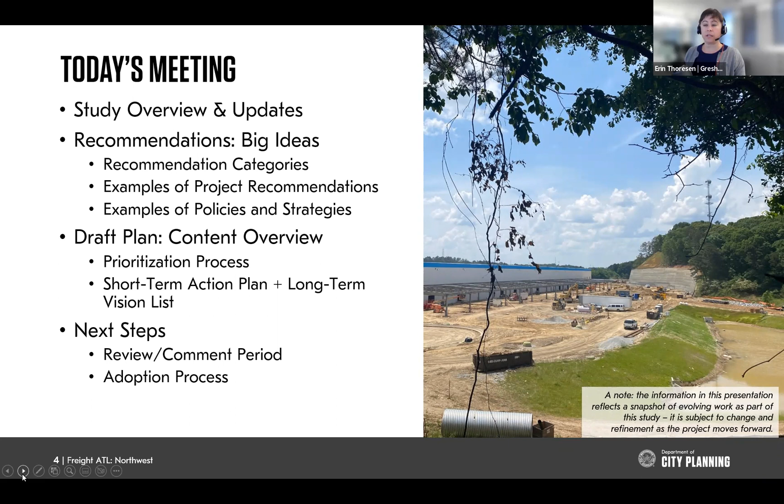I just want to mention that we are in the draft recommendations stage of this plan and process. So the information presented here tonight is a snapshot of a point in time where we are today, and some of this may change and evolve over the next couple of weeks as we respond to comments and make revisions based on the feedback that we get.

So with that, this is our planning study area. Nate briefly described it earlier, from the Armour-Ottley Industrial District and the Lindbergh area over to the Chattahoochee River, and then north of I-20, really north of Joseph E. Boone. This area was identified as a freight cluster when the Atlanta Regional Commission did their regional freight plan update back in 2016.

That's what this map here on the right-hand side shows. You can see right at the heart of this industrial area Norfolk Southern Inman Yard, the Chattahoochee Industrial District, the Atlanta Industrial Park, and others. At that time, they identified the need to do a more localized study and really focus on some of the needs and issues in this particular part of Northwest Atlanta.

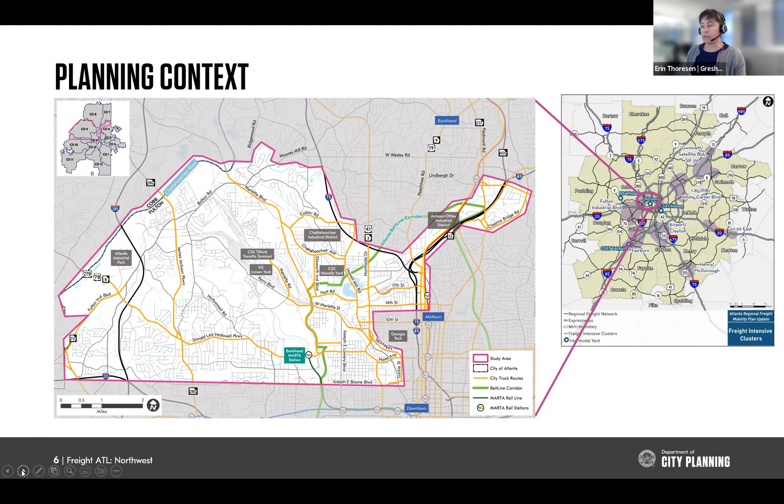As with all of the planning processes going on in the city of Atlanta right now, we want to take a step back and look at where we've come from and what the guiding documents are, and how they relate to Atlanta City Design, which is the city's visionary document guiding growth and development for the long-term future of the city. So all of these other planning efforts and studies follow on to that and are really putting forward different strategies for how to grow and develop in the spirit of that vision.

Freight ATL is just one of those many plans, and it will help focus on specific strategies within Northwest Atlanta, informing policies and potential infrastructure projects in the future. All of this is working in concert with these other foundational documents related to transportation, comprehensive planning, economic development, and resiliency.

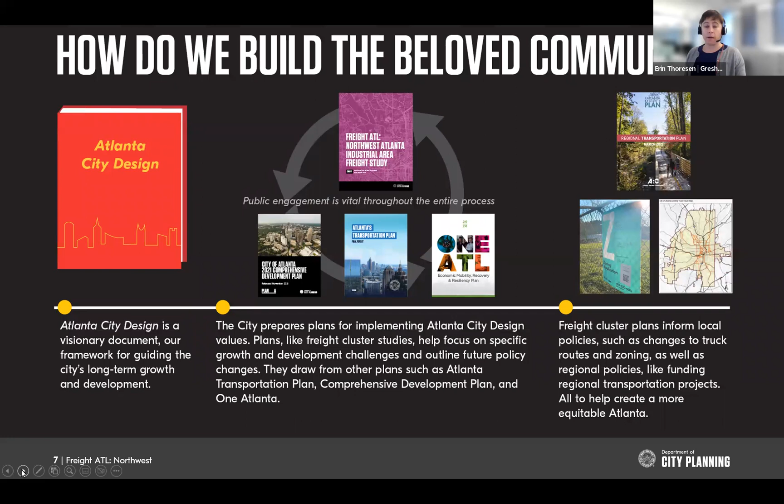Over the course of the last year, we have been engaged in a number of different activities and tasks. We kicked off last January and have gone through a process of research and analysis and data collection, case studies, looking at traffic operations and transportation within Northwest Atlanta, and then moving into developing recommendations based on the needs and the issues that we've observed through our process.

We've also done quite a bit of stakeholder engagement and community outreach over the course of the last year. We have a study advisory committee that we've worked with, consisting of representatives from different agencies and organizations throughout Northwest Atlanta, along with the Atlanta Regional Commission, Georgia Department of Transportation, ATL DOT, and the Upper Westside CID, which has been very involved as well. We've got Piedmont Heights well represented too. A number of folks have participated and guided us along the way through this process.

We also conducted a number of insight sessions, small focus group conversations with industry representatives and community members, neighborhood representatives. We did some walking tours in different areas throughout the study area, looking at specific issues on the ground, observing firsthand what it feels like to be a pedestrian in those areas, what happens when freight vehicles are moving through the area, really understanding from that firsthand perspective.

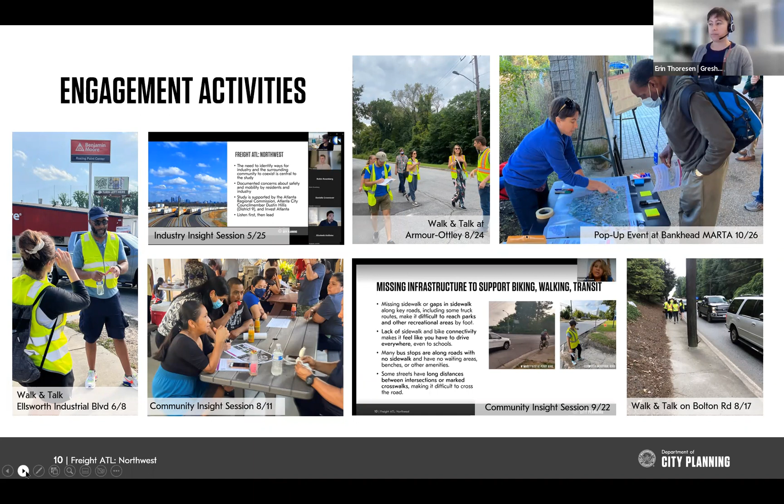I mentioned earlier the online story map. This is a really fun way to engage with the plan and learn more about the work we've done. You can go to freightatl.com and view the story map through that website. There's a link under the Get Involved tab, and it really walks you through the process.

What is this plan about? What is the study doing? Why is it important to study freight in Atlanta? It now features some draft recommendations and an interesting section on the history of freight in Atlanta, which I encourage you to check out. There are some really interesting write-ups and great photos from different eras.

So feel free to go and explore those maps and take a closer look at the resources that are there.

I wanted to take a step back and say we've heard a lot from different community members and stakeholders along the way over the last year, and there are several key themes that really resonated with us that we heard over and over again.

Some of it has to do with driver behavior and the combination of the size and weight of freight vehicles, narrow travel lanes, and the lack of separation between sidewalks and vehicle lanes. That makes it uncomfortable or feels unsafe for people walking or biking in these areas. You can see some examples of missing sidewalks or lack of buffer space between vehicles and sidewalks in the photos.

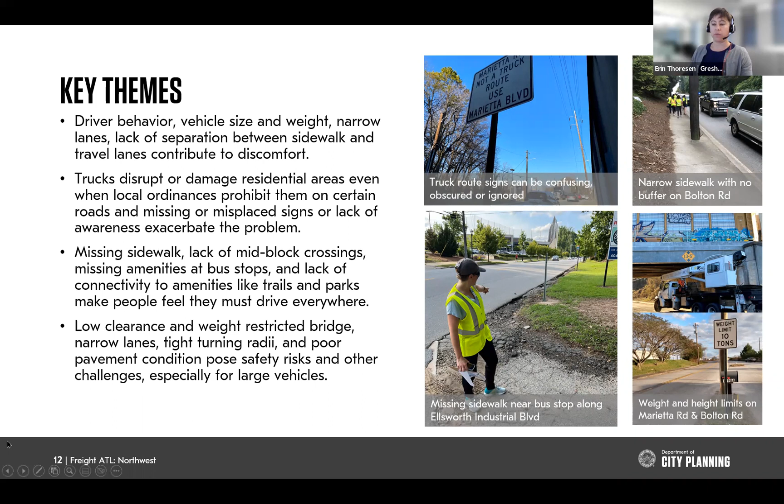There's a lot more that we heard too, but these were some of the themes that really stuck out with us. So we hope you'll see in some of the recommendations that we've tried to address a number of these things through design projects and other types of recommendations offered in the plan.

How are other communities doing engagement when it comes to freight projects? We also inventoried existing conditions and assessed the needs of the transportation network throughout the study area, looking at what projects have been identified, current travel patterns, land use, and really a variety of topics.

We also had partners on our team that took a deep dive into the industrial development and jobs side of things, thinking about the economic value of industrial businesses in Northwest Atlanta, the jobs they provide, and how they contribute to the overall economy. There are manufacturers, distributors, and all kinds of different businesses that help the economy keep running. That report talks more about the trends they've seen in terms of the high impact clusters within Northwest Atlanta.

And then lastly, we did a more detailed traffic study, diving into the safety and operations at 14 different intersections throughout the study area to help inform our recommendations.

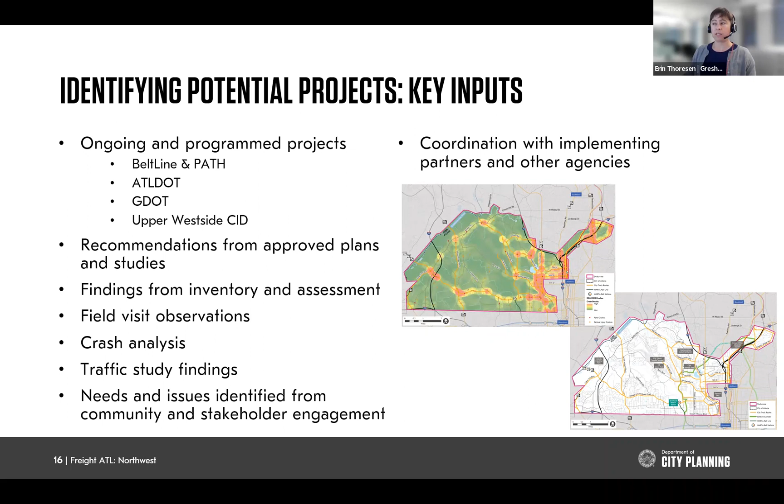So at the end of the day, we've landed on two broad themes or categories of recommendations within the plan. There's capital projects, which are your infrastructure projects and studies. And then there's policies and strategies. Within capital projects, we've identified intersection improvements, corridor improvements, bridge and railroad crossing improvements, some transportation technology improvements, and workforce access and multimodal improvements.

So sidewalk and bus stop upgrades, as well as a couple of studies to take a closer look at certain areas that might need a little bit more detailed analysis or a holistic look at what should really happen within those areas.

Under the policies and strategies, there's two subcategories. One is focused on industrial development, jobs, and land use. So those include strategies related to supporting, attracting, and retaining industrial businesses, mitigating land use conflicts, and understanding how to support businesses and strengthen access to jobs for people that live in the study area or the surrounding areas.

And then we also have transportation and planning related policies and strategies that focus on coordination among and across different projects, ensuring that there's coordination between the city and other regional partners as future plans are implemented and planning documents are updated. We also are looking at recommendations to the city's designated truck route network, improving infrastructure so that businesses and other users and people, neighborhoods and communities can all coexist. And then also some signage and wayfinding strategies as well.

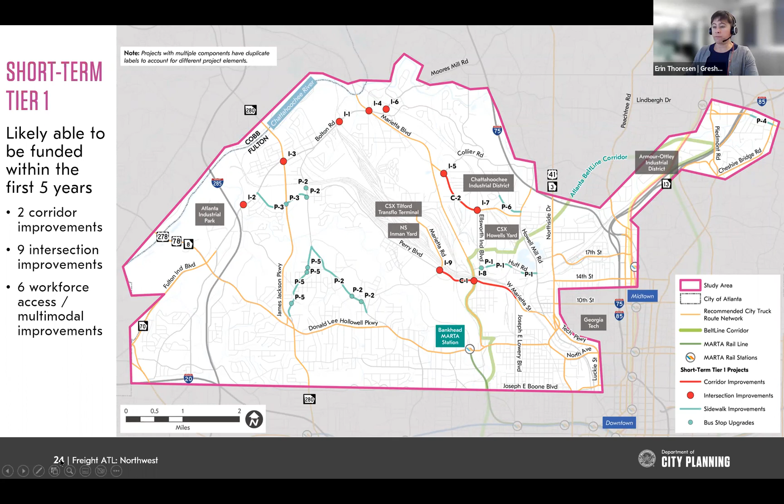I wanted to give a couple of examples of some of those particular types of projects. These are just a couple snapshots of what you would see in the report itself if you take a closer look. This is an example of an intersection improvement at Marietta Boulevard and Bolton Road that would install additional right turn lanes to improve safety and operations through this intersection.

It also would include additional signage to provide advance warning to drivers that there are traffic signals ahead, if they're maybe unable to see them as they approach the intersection through curves in the road.

And then installing additional signage, particularly to direct people to I-285, which is the official truck bypass around Atlanta, as well as helping drivers who may not be familiar with the area better navigate through it, so that they stay on the designated truck routes and aren't using roads where they're not supposed to be. So there's a couple of different components, but that's an example of one possible intersection improvement that is recommended.

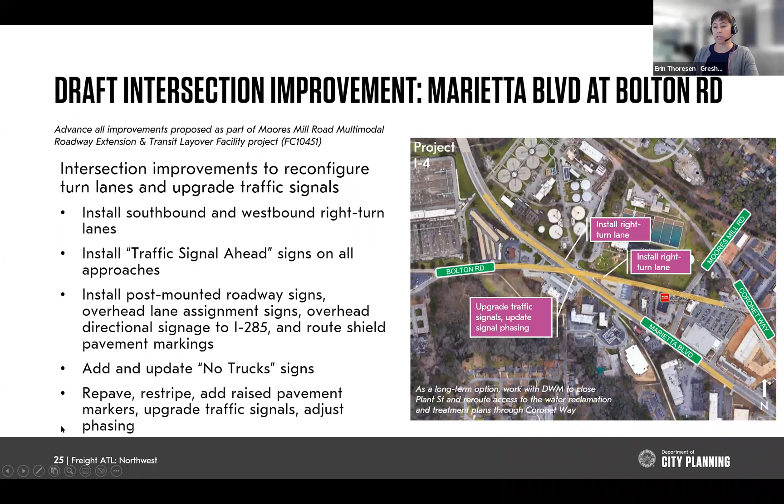We're also looking at a couple of corridor improvements throughout the study area that aim to strike a balance between the need for freight vehicles and transit vehicles alongside people walking and biking, recognizing that these are areas where you still have industrial businesses and trucks traveling through. So how can we provide a safer environment for everybody?

In this particular case, we're looking at providing one travel lane in each direction with a center turn lane that allows people to move out of the through lane in order to make that left turn, which helps reduce the likelihood of crashes.

By reducing the number of lanes, it makes it safer for pedestrians to get across the road. It could also allow for median refuge islands or raised islands where pedestrians are able to cross between signalized intersections. Overall, this recommendation helps balance safety and mobility needs along some of these key corridors, and there are a couple of similar projects recommended.

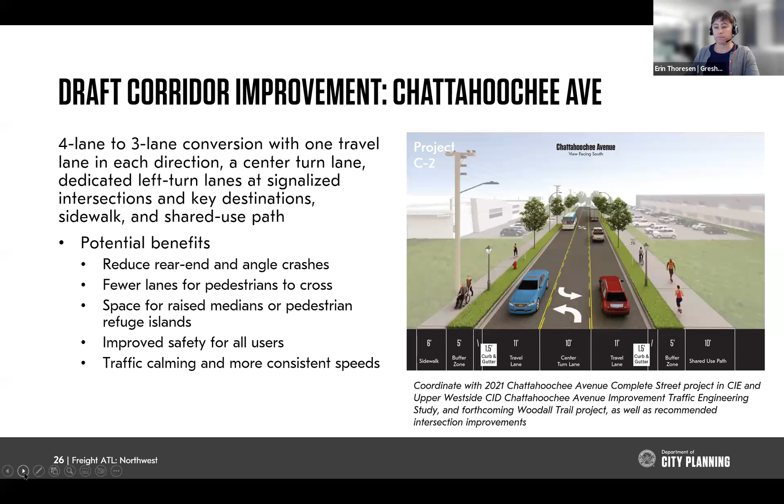In the short-term second tier, we have a handful of corridor improvements along longer segments of roadway, some workforce access and multimodal improvements, along with a couple of studies and some technology projects as well. You can see those spread throughout the study area here, represented by the red shades for corridor and intersection improvements, and the blue color for sidewalk and bus stop improvements.

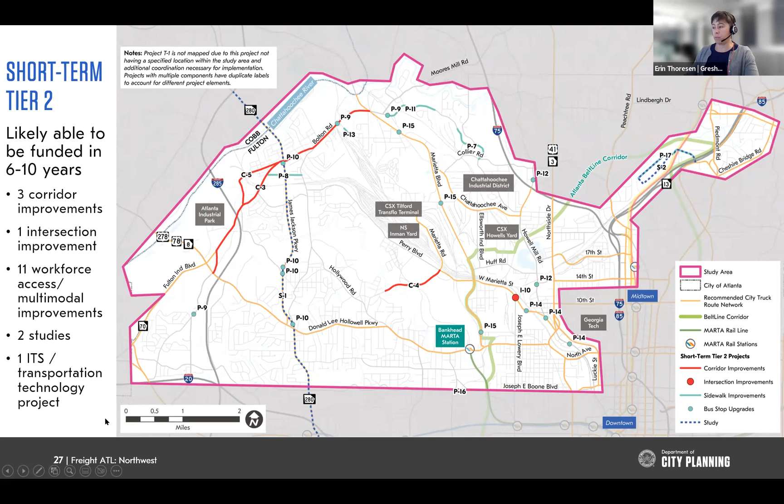As an example of one of the studies, we have here a recommendation for a more comprehensive, cohesive look at the Armour-Ottley district, understanding travel patterns a little better, and making some recommendations about how to streamline turning movements.

I know there's some active work underway to address drainage issues at the entrance to the district, where the city is putting in resources to try to come up with solutions in the short term. This project could build on that and help better accommodate all modes of travel in this area in a holistic manner that is sensitive to the needs of the businesses within the district.

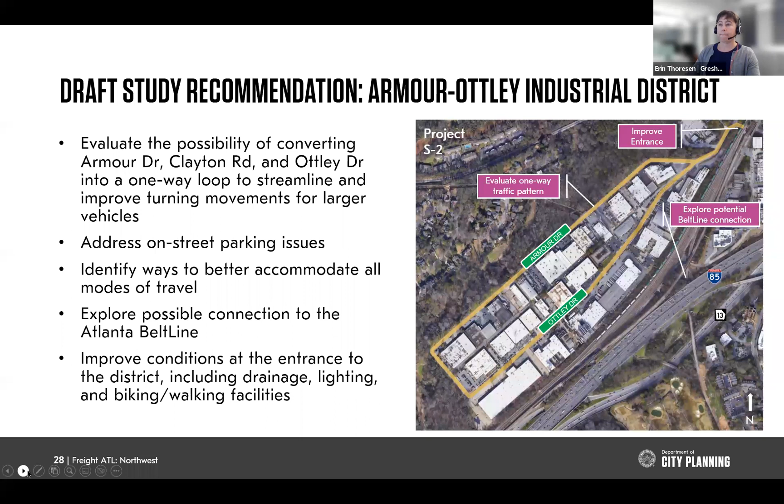We're also looking at some multimodal improvements along Parrott Avenue, particularly in this area as it lies fairly close to the Chattahoochee Brick site.

We anticipate seeing an increase of different modes of travel in the area as we see new trail projects coming through and potential future connections to the Chattahoochee Riverlands, which is not far from here. We wanted to use this as an opportunity to not only improve mobility for freight vehicles along this road, but also think about how we can better accommodate pedestrians and bicyclists, improve the at-grade railroad crossing, and evaluate some of the intersection geometry issues.

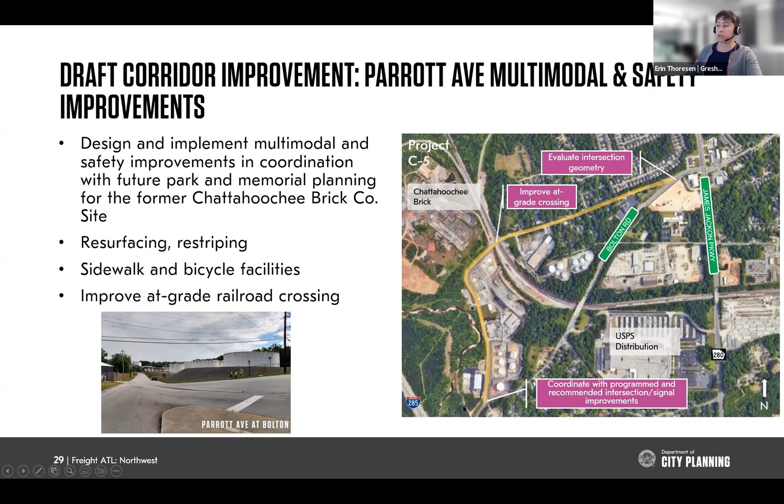At the western intersection between Bolton and Parrott over here, we also have a separate project looking at intersection improvements specifically at the signalized intersection on the western end of Bolton and Parrott.

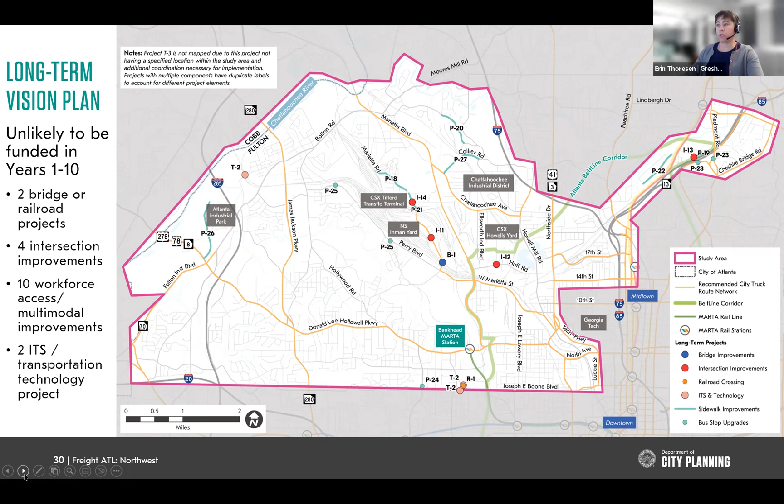In the long-term vision plan, there's again a combination of different project types, including some bridge and railroad projects, some additional intersection improvements, workforce access and multimodal improvements, along with possible technology improvements looking at at-grade railroad crossings and signage. So those are just a few snapshots of a couple of the types of projects that you'll see if you take a closer look at the report.

I did want to spend a little bit of time talking about some recommended changes to city designated truck routes. There are several different actions and strategies recommended as part of the plan, looking at removing some segments from the city designated truck route network that may no longer be needed based on our team's analysis of recent legislation, overall truck route connectivity, changing land uses, access to destinations, connections to interstate highways, and making sure those routes make sense and that there's overall connectivity.

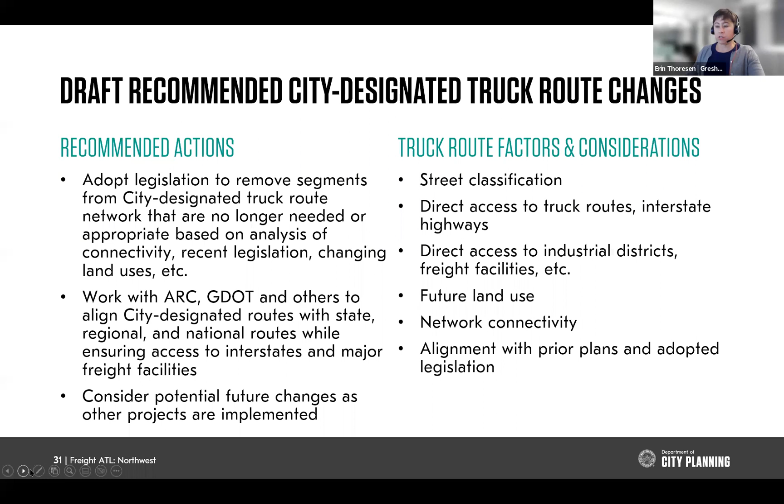Particularly in the Upper West Side area, we've got Ellsworth Industrial Boulevard, Huff Road, Howell Mill Road, and a couple of smaller segments, Elaine Ave, Jefferson Street, and a portion of Collier Road. We think that, based on all of the changing land uses and future development and the mixing of different modes of travel in these areas, it would still provide an overall well-connected truck route network that gives vehicles access to these industrial districts and the key destinations they need to reach, but also streamlines those movements and limits it to some of the roads in the area.

There are also a couple of potential future changes that might be associated with this. There are some ongoing Georgia DOT projects along Donald Lee Hollowell Parkway that, if implemented with certain pieces of recommendations currently being explored, might allow some additional changes to the intersection at James Jackson and Donald Lee Hollowell Parkway, for example.

So I know that was a lot of information. I do want to pause and see if folks have some questions. If anybody would like to raise their hand or drop a question in the chat, I'm not seeing any so far, but please feel free to do that. Otherwise, we can talk a little bit about where we go from here.

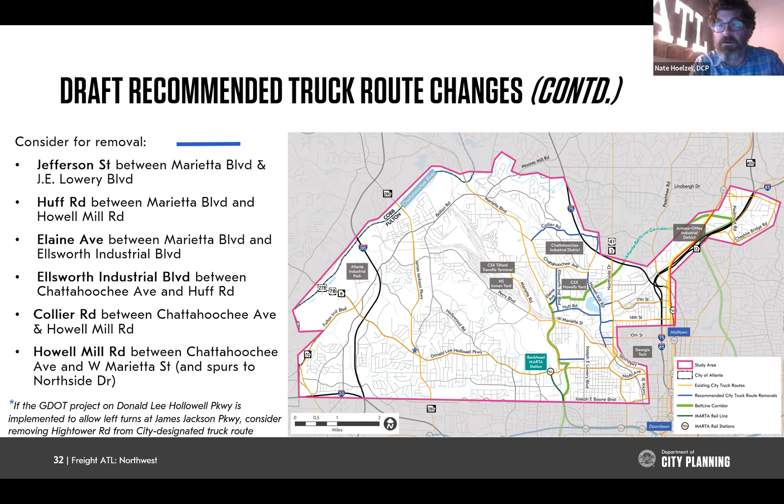Also, we're the Department of City Planning, and we have colleagues in other departments, specifically the Atlanta Department of Transportation. They also have a lot of work going on prioritizing projects and infrastructure, using our bond money to prioritize that. They recently kicked off their Vision Zero campaign, and I want to drop their Vision Zero project website in the chat. It's a great website, just launched last week. It has a really nice interactive map where you can show areas in your neighborhood where you feel unsafe, where there are missing sidewalks, and other things like that. So I think there's another avenue after this study for people to give their input and help prioritize these projects. I'll drop that link in the chat.

Councilmember Hillis, I saw you pop on the screen a minute ago. Do you want to weigh in here?

Yeah, thanks, sorry, I was having audio issues earlier and was also trying to get my kids in the house. But I want to thank everyone that joined, and I did provide some feedback. Thanks everyone for the questions. You've already covered a lot of the Bolton Road stuff that Ms. Foon asked.

The Bolton Road project is kind of an older project. I actually tried to get that project funded in the last TSPLOST and Renew bonds that we did back under the previous administration, but wasn't able to get those in there. So we're looking for additional funding. Much of what I typed and was responded to verbally is the case.